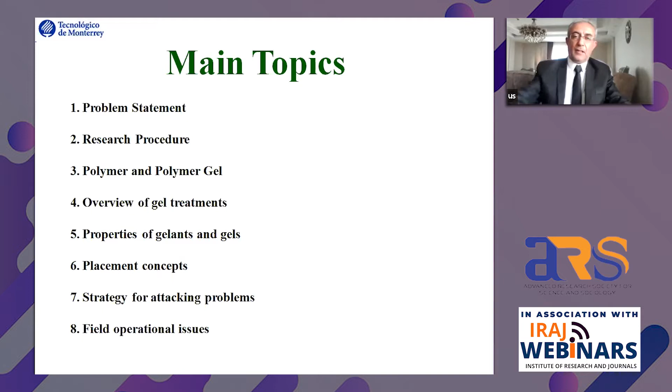As an introduction, as the rate of discovering new reservoirs decreases, improved and enhanced oil recovery techniques are becoming increasingly important for mature oil fields. IOR and EOR processes often involve injection of material not present in the reservoir, such as polymers, foams, solvents, and surfactants. Conformance control is a key IOR and EOR method, defined as any technique that encourages movement of normally unswept remaining oil and gas, bringing the drive closer to perfect conforming conditions.

So in order to achieve the preferred conforming condition and produce more oil and gas, water production must be minimized. Why? Because it becomes a major problem as the hydrocarbon reservoir matures. It's our policy in production and petroleum engineering, in oil and gas engineering, that when we produce from a hydrocarbon reservoir, we must try to produce only hydrocarbon, not other fluids. So water, as a non-hydrocarbon fluid, must remain in the reservoir and must not be produced.

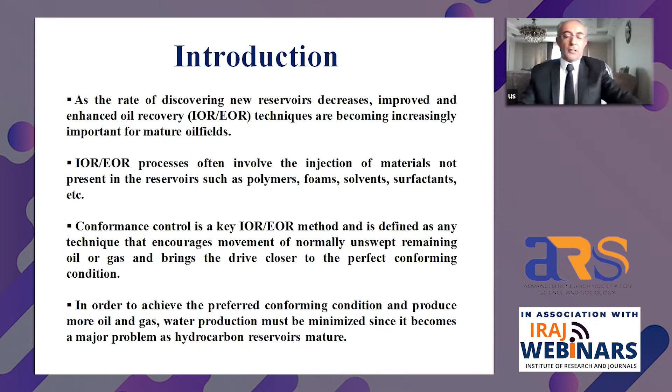Why? Because of several reasons that we will talk about in later slides. First of all, what is our problem? Nowadays, extra produced water from oil and gas reservoirs is one of the serious problems for the industry and for our companies. This is one of the most important factors which affect oil and gas production rate.

But extra produced water from oil and gas reservoirs can cause several problems: operational cost increasing. Generally, we have two types of problems: technical and operational, and economical. If we produce a lot of water at the surface in oil and gas reservoirs, we will have several operational, technical, and economical problems. Imagine we produce from a hydrocarbon reservoir, an oil reservoir, a crude reservoir - we produce 1 barrel of crude, and if 80% of this barrel is water, then actually we are producing water, not oil.

So we must minimize water production. Of course, when we produce oil or gas, some water will be produced as associated water with the oil or gas. But the amount of this produced water must not exceed a certain limitation.

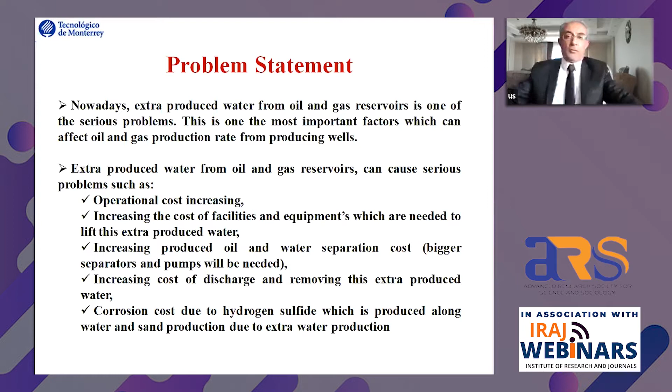We must not exceed production of water, so excess water production must be controlled. Why do we want to reduce water production? For two main reasons: to reduce operational expenses and to increase hydrocarbon production.

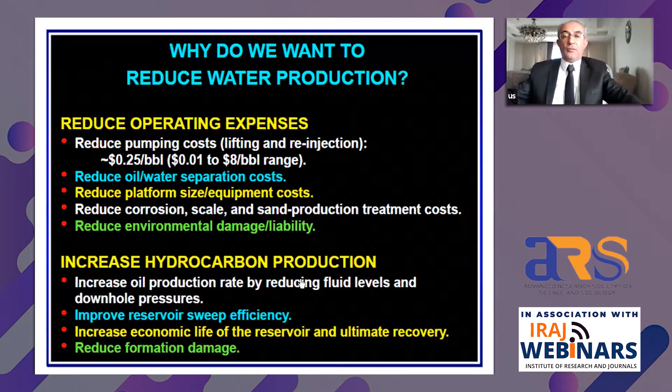At a static condition, a reservoir has a gas oil contact above, and a water oil contact below. We have a layer of oil, with a gas layer above and a water layer below. Between gas and oil, we have a gas oil contact. Between water and oil, we have a water oil contact.

So the water oil contact will be here, and the gas oil contact will be here, and oil will flow from the reservoir to the wellbore, and from the wellbore to the wellhead. This is the normal condition, a static condition.

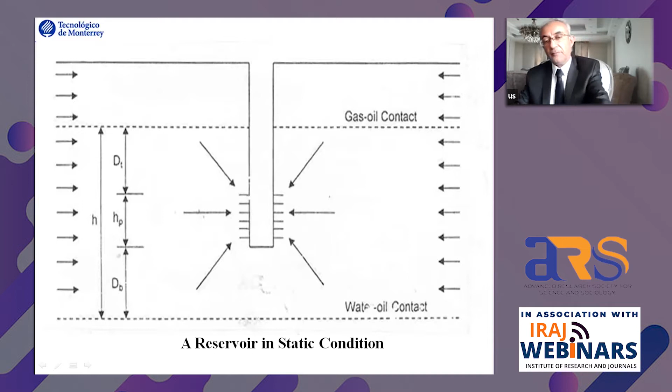But when we start to produce from the oil reservoir, the height of the oil column will begin to decrease. At the bottom we will have water, at the top we will have gas. So the gas oil contact and water oil contact will be shifted: the gas oil contact will move downward, and the water oil contact will move upward.

After several years, water will reach our producing interval. Here is the oil producing interval, from which we produce oil. After several years of production, water will reach this interval, and maybe the bottom of this interval will be invaded completely by water.

In this case, we will say that we have water coning. And the top of this interval may be invaded completely by gas, so in that case we can say that we have gas coning.

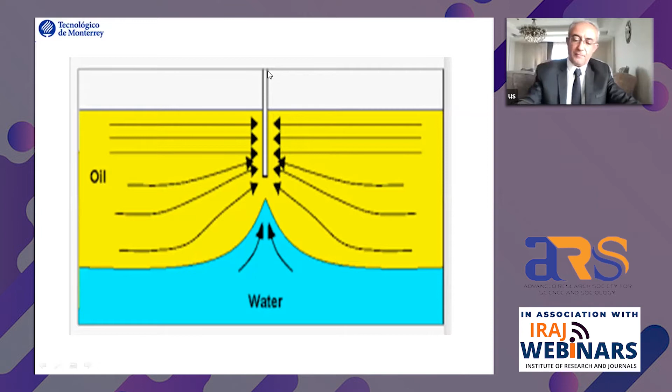That's the best way to imagine what will happen in the reservoir. From here we are producing oil, this is the oil formation. The oil flows from the reservoir to the wellbore through this producing interval, and then flows to the wellhead. But you can imagine what will happen at the bottom.

What will happen in this interval? Water coning has been taking place here, because water from the water layer is flowing into our oil producing interval, so this interval has been completely invaded by water.

So water is produced through this interval to the wellbore and then to the wellhead as associated water with oil.

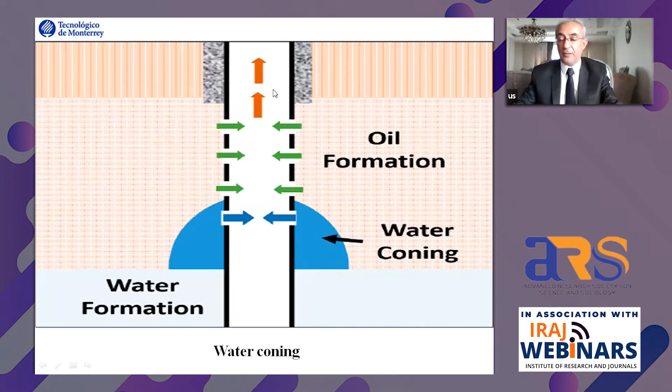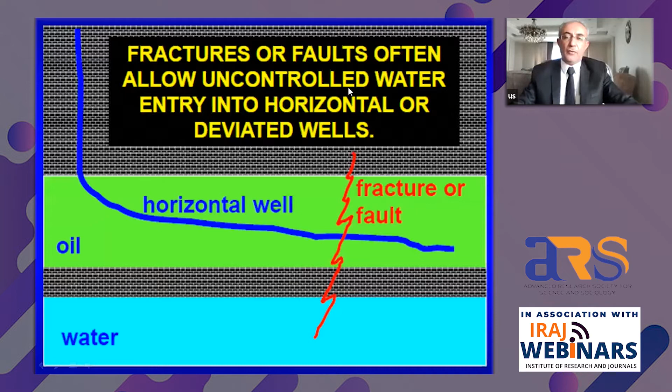Or channeling from an injector, for example through a fracture, water can flow through the fracture to the wellbore and then to the wellhead. Or water coning, as we discussed, where we may have water coning at the bottom of the producing interval, something like this, and then water can be produced.

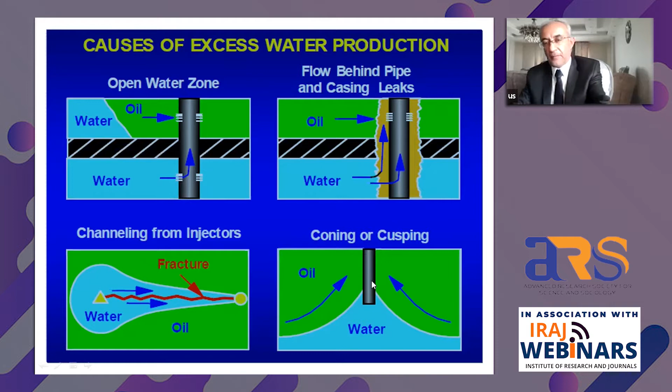So this is our problem. Now we have a problem. What is the problem? Now we must find the solution.

For the solution, we have two methods, two types of solutions: chemical solution and mechanical solution. In chemical solutions, we have several methods, same as polymer gel injection. That is our topic for today's discussion.

In mechanical solution, we may have packers and plugs. In mechanical method, there are several methods to solve this problem, same as horizontal drilling, deviation drilling, using tubing in production, passages of water, wellhead separation facilities.

In horizontal and deviation drilling to solve this problem in mechanical methods, we might drill horizontally, or we may drill by a deviation to be far from the water zone, to avoid water coning.

Or in wellhead separation facilities, at the worst case, we may have to increase the separation facility at the surface to be able to separate water from the oil.

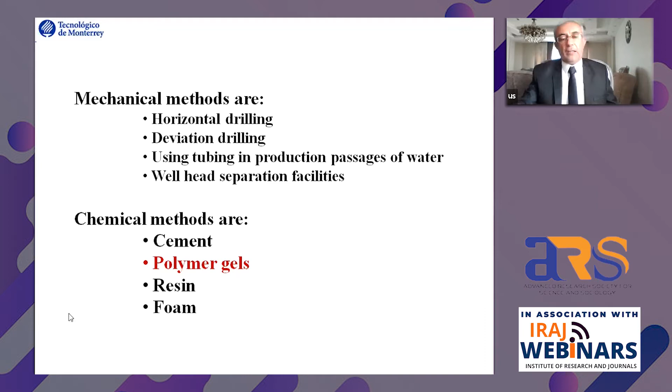But through this interval, we produce unwanted water production because of water coning. So we can install a plug like this, and this unwanted water cannot flow to the wellbore and then to the wellhead. So this water will be blocked. The pathway of this water will be blocked by this plug.

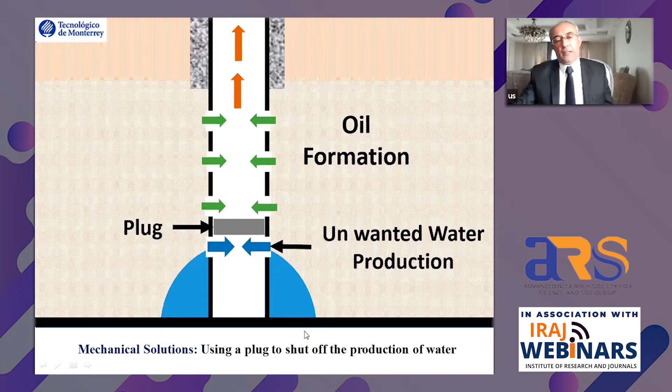Another solution is chemical solution. In chemical solution, one of the methods is to inject polymer gel. So polymer gel injection works like this. We have several producing intervals: the top, the intermediate, and the bottom.

So the objective of water shutoff treatment is water shutoff without seriously damaging the hydrocarbon productive zone. Yes, of course, we want to decrease water production, not hydrocarbon production.

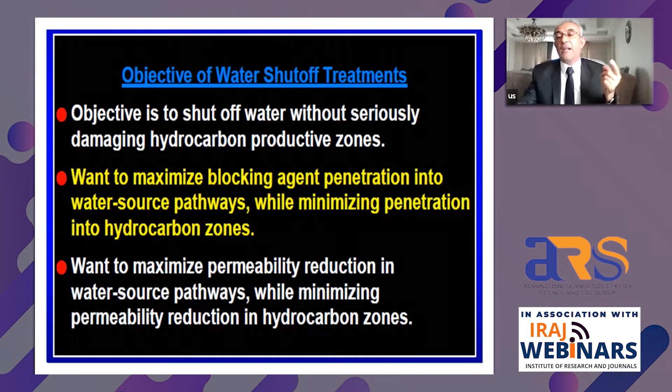But reservoir rock permeability to oil must be maximized or its reduction must be minimized. Why? To have a lot of production of oil. We don't want to decrease oil production, we want to decrease water production. So reservoir rock permeability to oil must be high, and reservoir rock permeability to water must be minimized, must be decreased.

So the objective and scope of our research is to prevent extra production of water. There are several methods, but knowing the reason of extra water production is the base to choose the best method to control it. So for this purpose, knowing the reason of extra water production is essential for choosing the best method to control it.

Generally, as we discussed, we have two types of solutions for this purpose: chemical and mechanical.

So what will we do in this research? We will try to find a suitable polymer gel to prevent extra water production from an oil reservoir. So we must find a polymer gel which has a lot of effect on water permeability and a little effect on oil permeability.

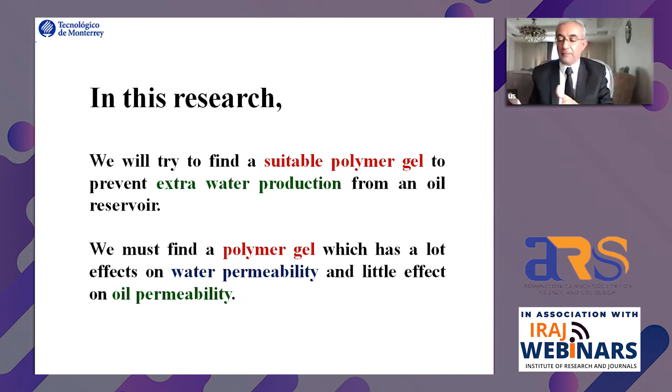But for this purpose, not only in this research but in our total research projects, we have procedures. In this research project, we will start first by focusing on characteristics of the reservoir, and finally several steps. Not only in this research but also in our total research, we have several steps. At the first step, we will have data gathering, data collecting, or literature review to know the problems.

Then at the second step, we may check our ideas, our data, our information by software, by computer. So at this step, we may have a modeling, a simulation by software to check what is the best method for solving the problems.

At the third step, after modeling and simulation, we may have a laboratory test, so we may test our ideas at the laboratory. And then after the lab test, we may have a pilot test in a small scale test.

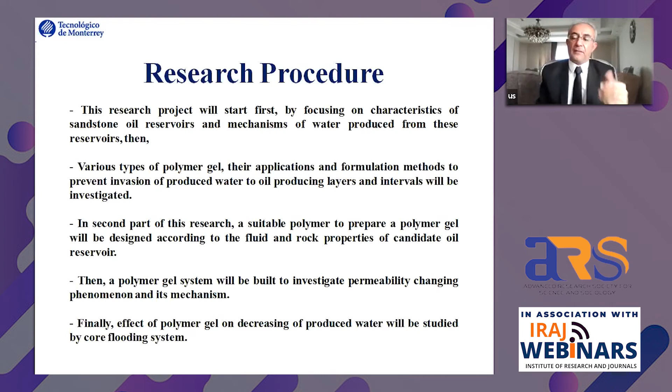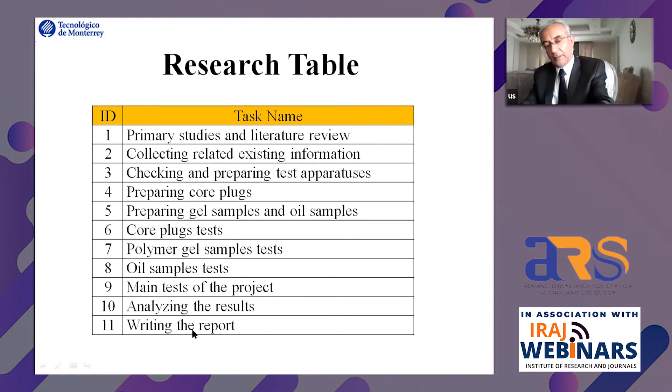We found that one of the methods to solve this problem is the chemical method, and in the chemical method we selected polymer gel injection. But what is polymer gel injection? It is a process where polymer gel is injected into a reservoir to prevent extra production of water. This process has been considered as a technique for controlling produced water while pushing the oil of the reservoir.

By injecting polymer gel with modified properties, the wetting properties will change toward a more water-wet reservoir. So by injecting polymer, we will try to change the wetting property toward a water-wet reservoir.

Why? Because according to our definition, a water-wet reservoir will absorb water and will push the oil. If we have a reservoir that absorbs water, the water will remain in the reservoir and will not be produced at the surface. If we have a reservoir rock that is water-wet, it means this rock will absorb water and push the oil. That's exactly what we want.

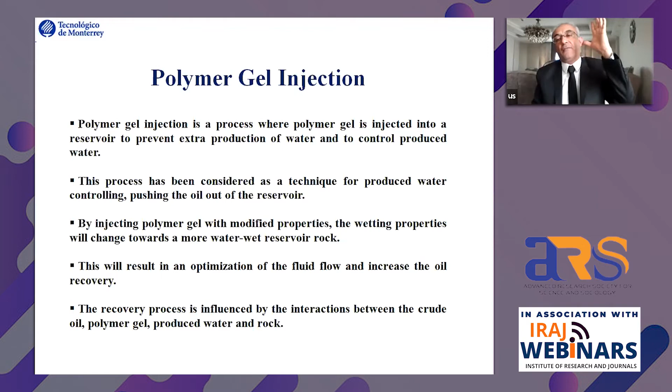Okay, so we know that polymer gel injection is a method, and maybe the best method based on the condition of the reservoir and our operational and economical condition. But we have many types, so what type of polymer? We have many polymer gel systems that have been developed based on the condition, the temperature, the ionic condition, the pH, the salinity, and other toxicity and other things.

So we have several polymer systems. A polymer may be resistant to temperature change, another may be resistant to pH change.

So you know that when we talk about a reservoir, this reservoir is 4, 5, 6, 7 kilometers underground. At 5 or 6 kilometers underground, the temperature and pressure are very high. We are not at the surface, we will be at a reservoir several kilometers underground. The pressure will be very high, the temperature will be very high. If we use a polymer, it must be resistant to high temperature, to high pressure. Its properties must not be changed at high temperature, high pressure, and at high salinity, because in the reservoir we have high salinity.

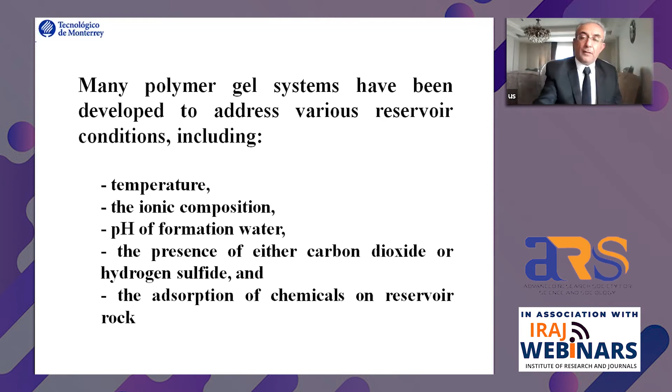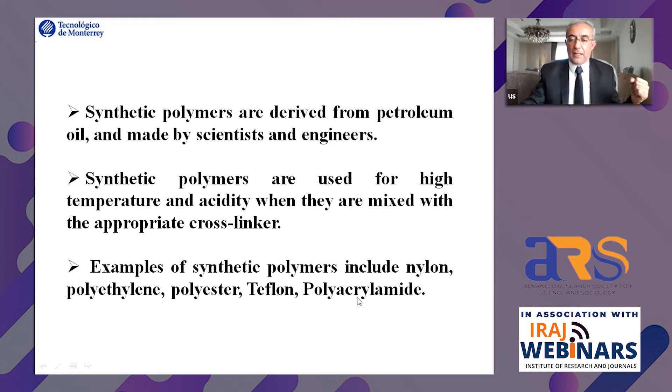So polymers used in the industry, generally we have two types: synthetic polymer and biopolymers. Synthetic polymers are derived from petroleum, oil, and made by scientists and engineers. This is our definition. Synthetic polymers are used for high temperature and acidities. They are mixed with an appropriate cross-linker, so the polymer must be mixed with a cross-linker to make a polymer gel. We will discuss the cross-linker later in our slides. Examples of synthetic polymer include nylon, polyethylene, polyester, Teflon, and polyacrylamide. Here in our project we selected polyacrylamide as the suitable polymer.

And we have biopolymers. Biopolymers are polymers produced by or derived from living organisms such as plants rather than from petroleum, so the primary source of biopolymers is renewable. Of course the prefix bio means biodegradable material, and it means they are produced by living organisms. Xanthan is a biopolymer.

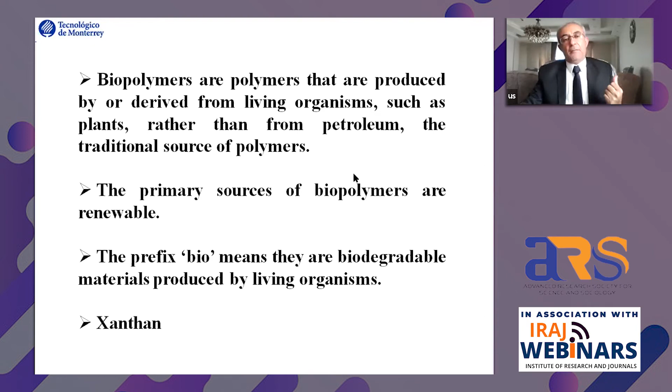Okay, so what about the cross-linker? Imagine we have a polymer, and this polymer will be mixed with cross-linker to make a polymer gel. So we have gelant and we have gel. Gelant is the polymer cross-linker solution before gel formation, gel is the cross-linked structure after the reaction. So gelant is flowing, but gel will be stopped without flowing. So we add polymer and cross-linker to each other, a gelant will be formed. This gelant will flow into the reservoir, and after 1 hour, 2 hours, 3 hours, a polymer gel will be formed, and this polymer gel layer will not be movable, will be stopped, and will block the water pathway.

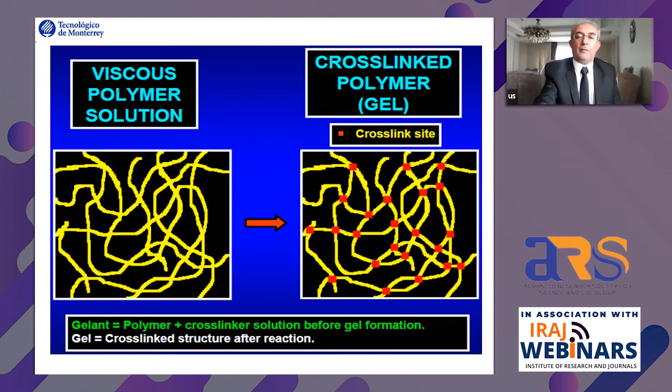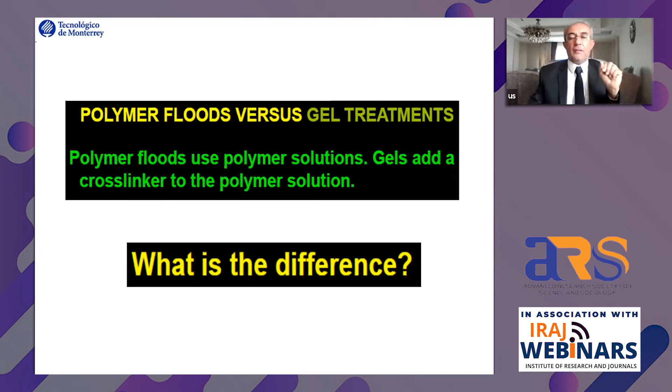So at the beginning we discussed a little difference between polymer flooding, or polymer solution, and polymer gel. There is a little difference between these two. Sometimes we inject polymer into the reservoir as a controlling agent, to decrease the mobility of water and to increase the viscosity of water.

So sometimes for a polymer flood, polymer penetration into low K zones must be maximized. Why? Because in low K zones we want to increase the viscosity of water and decrease its mobility. If the mobility of water is decreased, the mobility of oil will be increased, so oil can flow easily.

Here, for a gel treatment, gel penetration into low K zone should be minimized, but in high K zone it must be maximized. Why? Because most of our water production problems come from high K zones, since water can flow easily there and can be produced. So we block the passageway of water in the high K zone, so that water cannot flow to the wellbore and then to the wellhead.

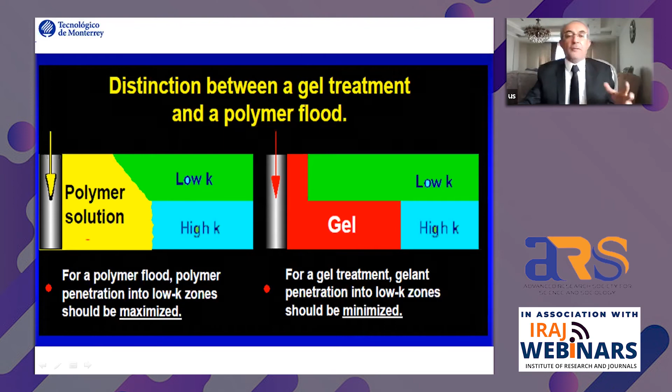So by polymer injection we have two main ideas. Maybe we use polymer as a mobility control agent; in this case penetration into low K zone should be maximized. Sometimes we use polymer as a blocking agent; if so, penetration into low K zones should be minimized, and penetration into high K zone should be maximized, because in this case we want to block the water.

Okay, so this is polymer flooding, the best method for improving the sweep in the reservoir where fracture does not exist. And in polymer flooding, as I told you, we want to increase the water viscosity and decrease the water mobility.

So water production will be decreased. Gel treatments are the best method for fractured reservoirs that cause channeling. In gel treatment, a gel layer will block the passageway of water.

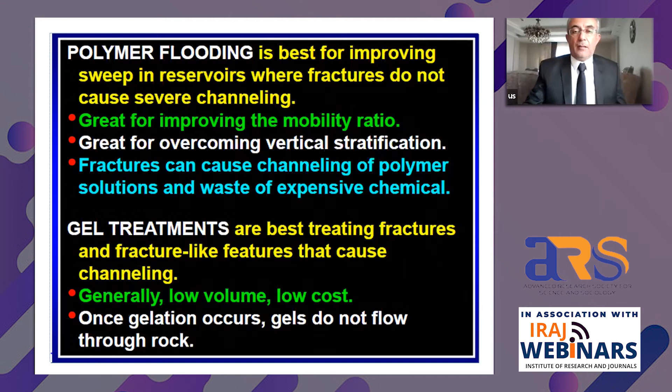Polymer flooding is an EOR method that uses polymer solution to increase oil recovery by decreasing the water-oil mobility ratio.

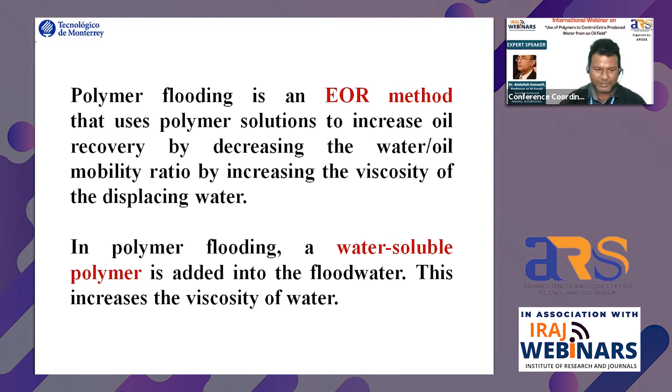In polymer flooding, a water soluble polymer is added into the floodwater, so this increases the viscosity of the water. Okay, so basic properties of gel and gelant.

We have several systems for gel and gelant. We selected here chrome 3 as a cross-linker and polyacrylamide as a polymer. We added these two together to make a polymer gel system.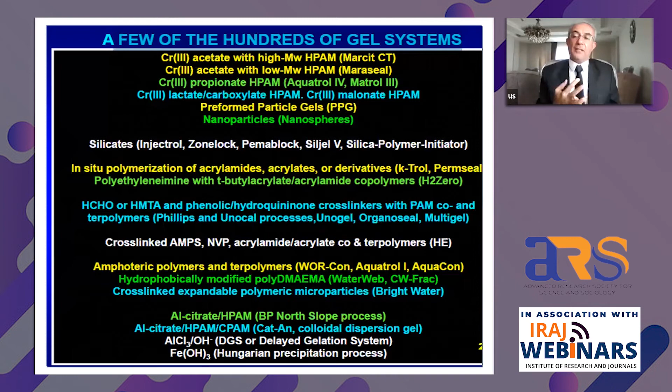But if we have several polymers, several systems, when to use this polymer or select that polymer depends on several factors: cost, availability, and other considerations.

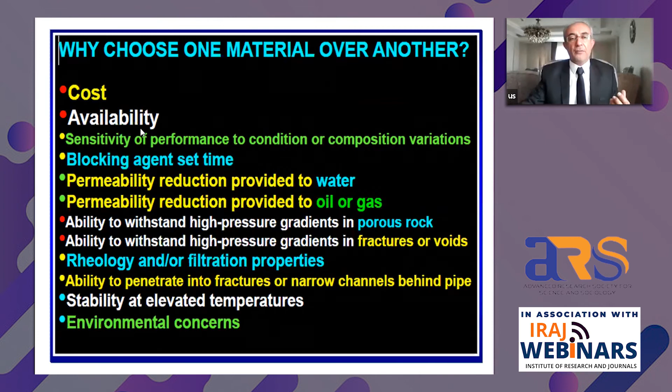So here you can see what will happen: gelant versus gel. A polymer solution like hydrolyzed polyacrylamide, cross-linked with chrome 3, will become gel. In a gelant, few cross-links have been made, so gelant can flow into the rock just like an uncross-linked polymer solution. After some time, 4, 5, or 6 hours, the gelant will convert into a gel.

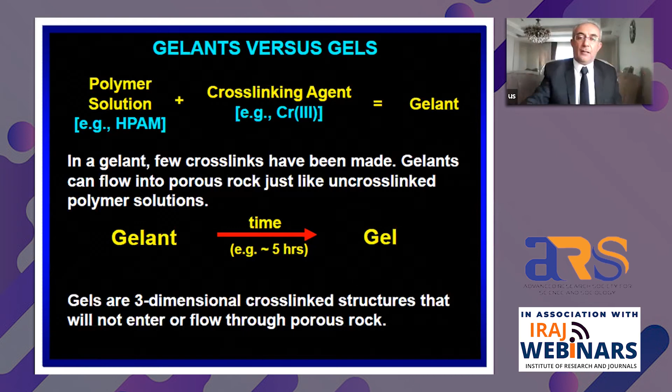Gel is a 3-dimensional cross-linked structure that will not enter or flow through the rock. So when a gel layer is formed, this gel layer will stop the flow. Gelant flows freely like a polymer solution into the reservoir.

And here you can see partial gel formation after some time, and here gel filling the aqueous pore spaces after several times.

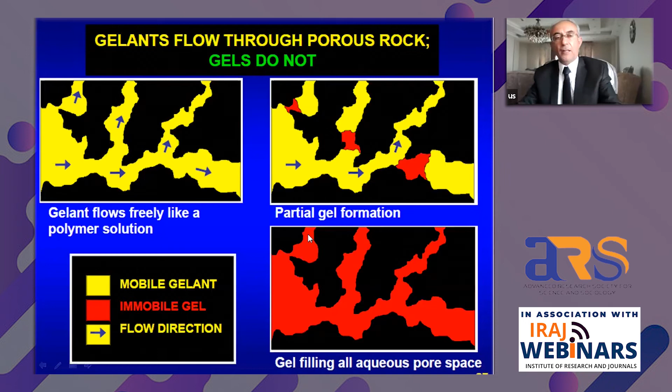So properties of available gelants: early in the gelation process, gelant penetrates readily into the porous rock. After gelation, gel penetration into porous rock is extremely slow and negligible, as we discussed. The transition between these two conditions is usually of short duration.

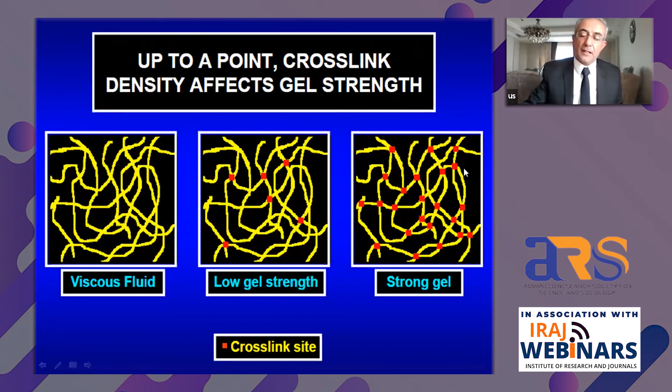And cross-linker: here you can see we have a viscous fluid, here low gel strength, and here a strong gel. Why? Because the cross-linker has been increased. Here we have a lot of cross-linker in this case. So if we increase the cross-linker, the gel will be stronger, like here.

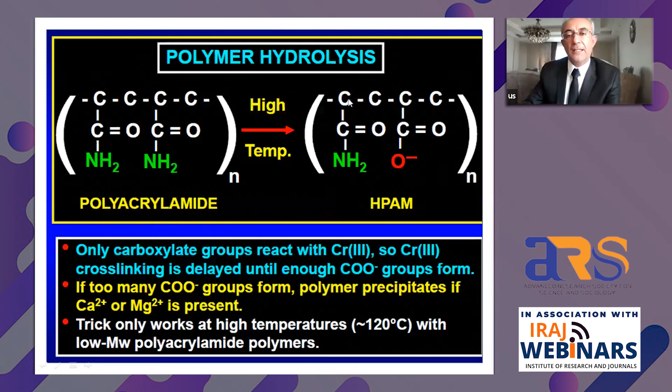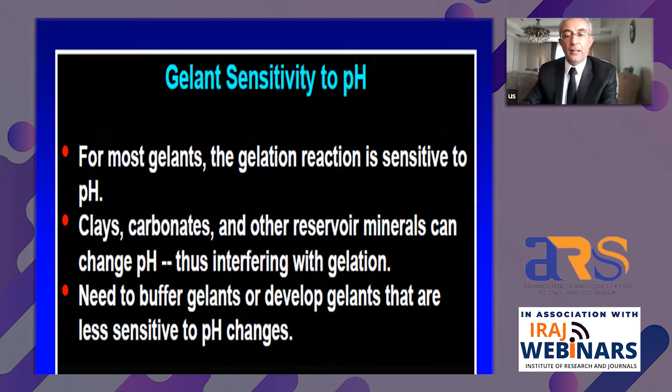And we check our gelant system against pH. As I told you, if we select the gel, it must be resistant to pH variation. We check what will happen if the pH has been changed.

This is for polymer gel, but within polymer gel we have several polymer gel systems, and organic gels, which we will discuss. Here we have some choices, but what types of acrylamide polymer do we select?

For acrylamide polymer, first of all we have non-ionic acrylamide, second hydrolyzed acrylamide. So if polyacrylamide is the best polymer, we have several types - which one is the best? So we check several: non-ionic acrylamide, hydrolyzed acrylamide, sulfonated acrylamide, and hydrolyzed and sulfonated acrylamide together.

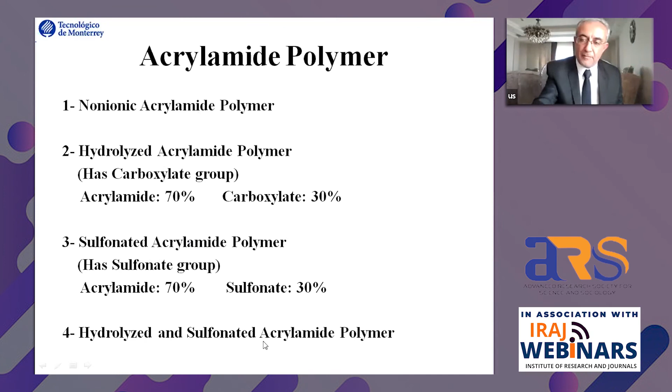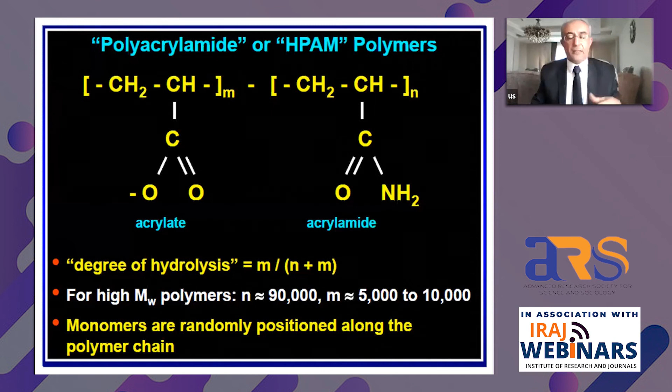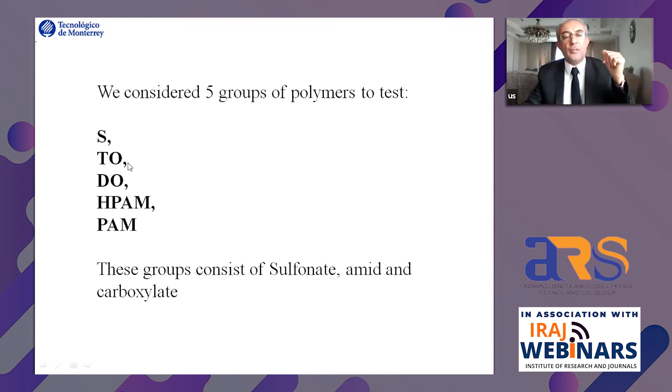Polymer acrylamide or HPAM polymers, this is its structure. We consider 5 groups of polymer to check. Through these steps, we know that polymer acrylamide is the best, but which one? This group, that group. We consider 5 groups and check them, and finally we will select this one.

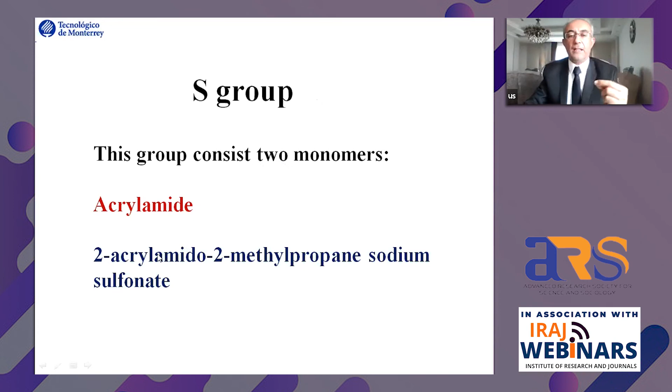S groups: this group consists of 2 monomers, acrylamide and this one. This is the general structure of this group. Then other groups, TO groups. This is a terpolymer, which consists of acrylamide, sodium acrylate, and 2-acrylamido, 2-methylpropane sodium sulfonate.

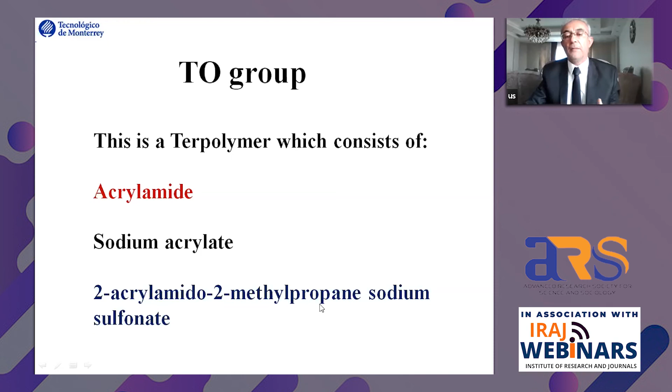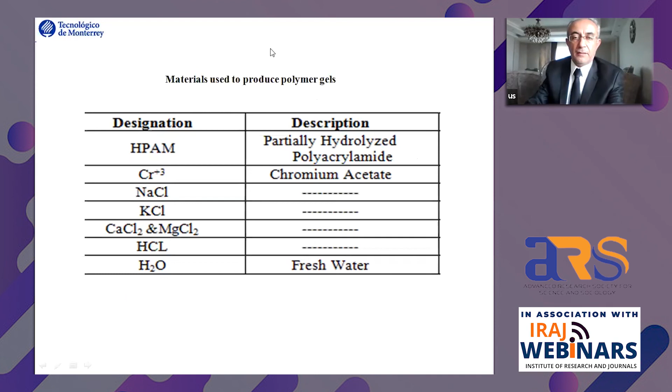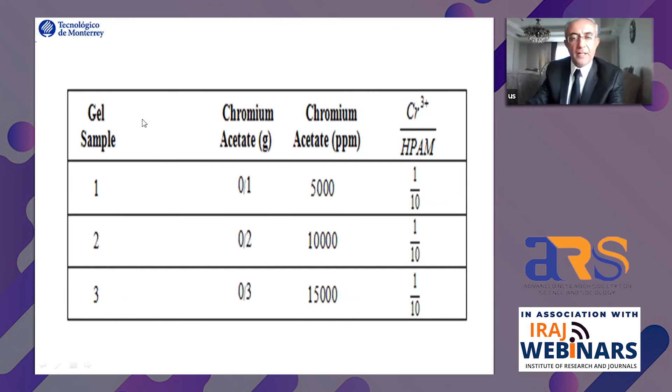This is the material used to produce this polymer gel. You can see here, this is our sample. So we provided several samples and checked all of them, and this is the results of our tests.

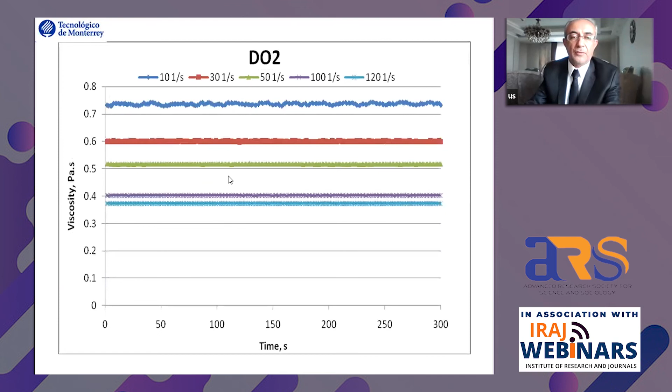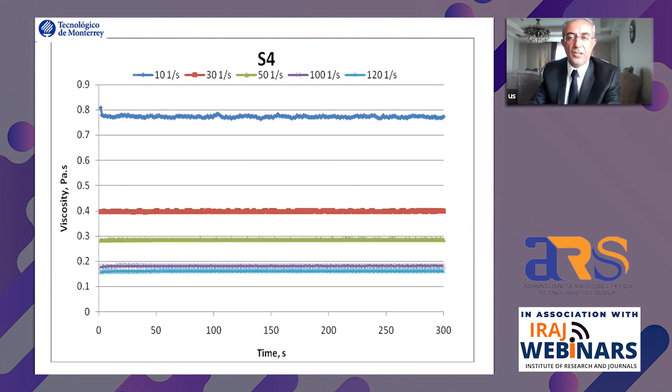We provided several samples and checked their viscosity versus time, at various shear rate versus time. Here you can see we checked the time and viscosity for several acrylamide systems, and here we check the polymer concentration with gelation time.

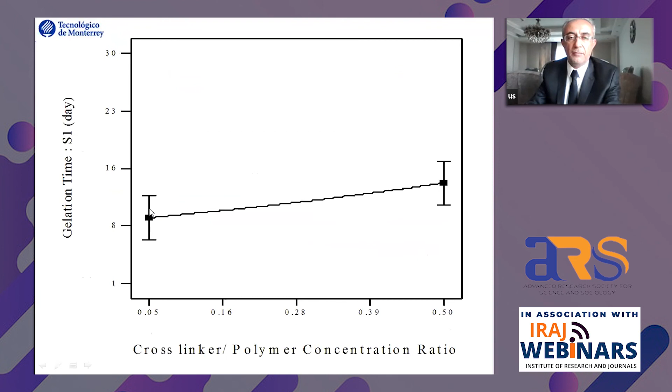For these types of polymers, for S1, for S6 group, for example.

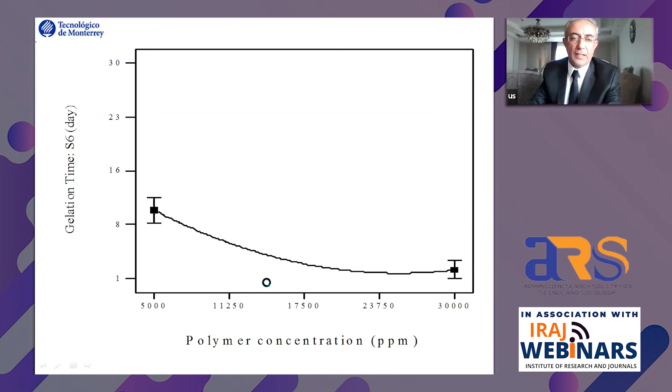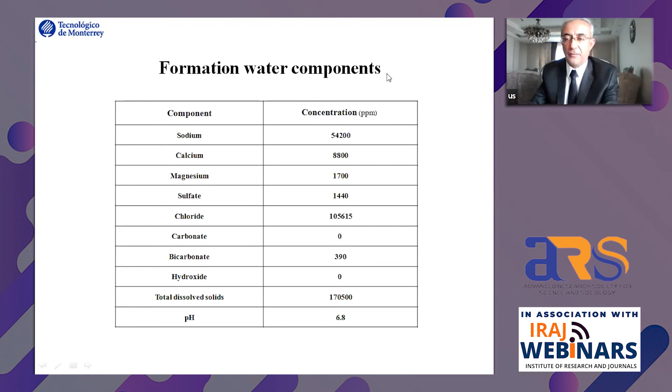Here is the formation water component, that this polymer must be suitable for this water, because this is our formation water at the reservoir. This is the effect of formation water on the polymer gel that has been checked.

Finally, this polymer has been selected, sulfonated acrylamide polymer for this reservoir. Maybe for another reservoir, another polymer will be suitable.

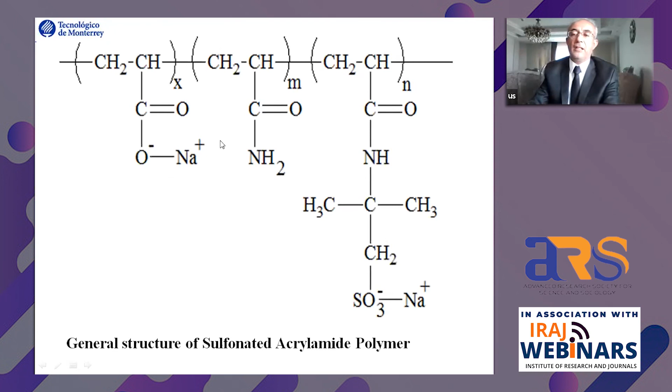So a sulfonated acrylamide polymer with 70% acrylamide and 30% sulfonate was selected, but after that we checked that if we increase the acrylamide to 75% and decrease sulfonate to 25%, this will be stronger. So finally, this is our final choice, this is the best polymer.

Now we are at the field test for how we can inject it into the reservoir. This is our problem: we have water production. This is our treatment.

Here we are going to treat it with gel, and here you can see that gel has blocked this layer, and oil will be produced from it. Here you can see we may have water production from here, but gel will block the water layer and water will not be produced.

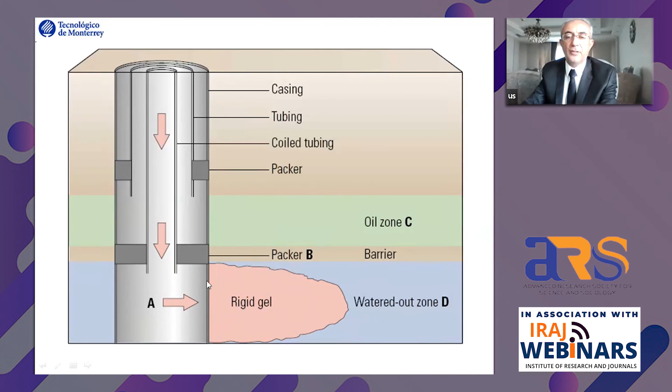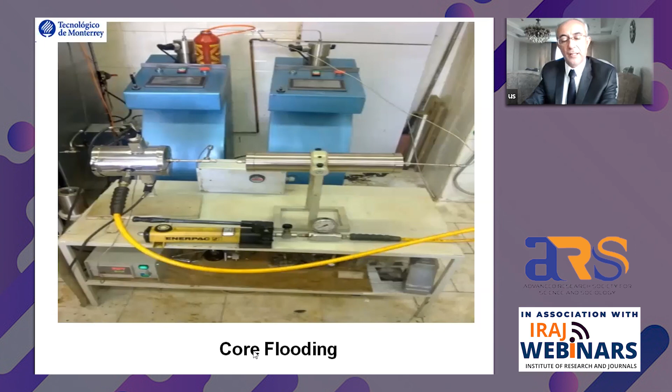These are the samples we checked. These are our devices at the laboratory, this is core flooding. We put our cores into these devices. This is core flooding, this is the core flooding device at the back, this is the core holder device.

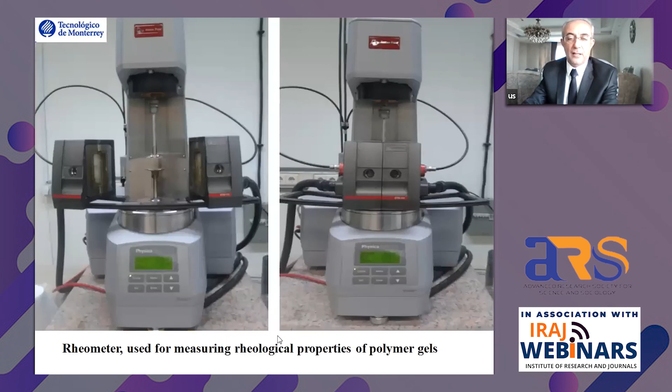This is viscositometer in the laboratory, and these are flow meters. For field application, we have tanks like this and a pump, and then we inject into the wellhead, and then from the wellhead into the wellbore and into the reservoir like this.